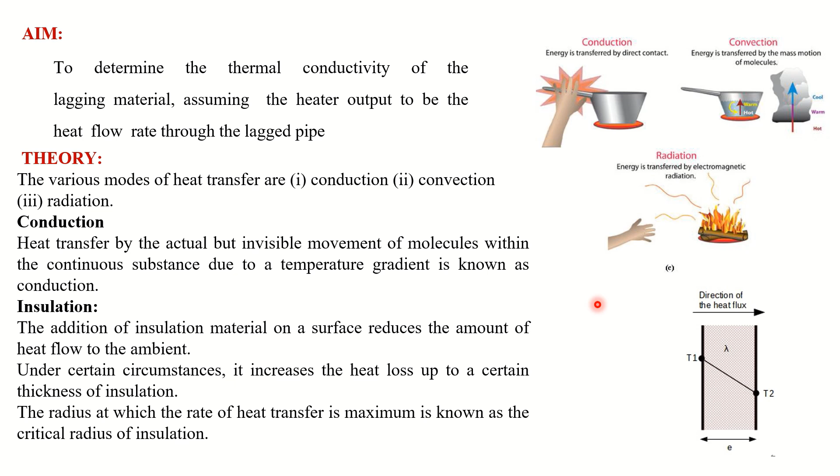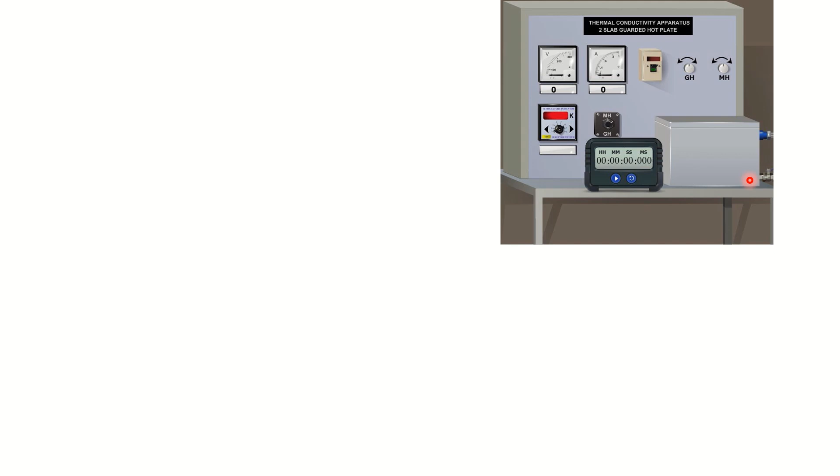So what is the aim of the experiment? To determine the thermal conductivity of the lagging material by performing an experiment in an experimental device. So what is that experimental device? Let us see how it looks and the description of the experimental setup. The experimental setup consists of a rectangular duct. Inside this rectangular duct, we have a hollow cylindrical pipe which is covered with two layers of insulation.

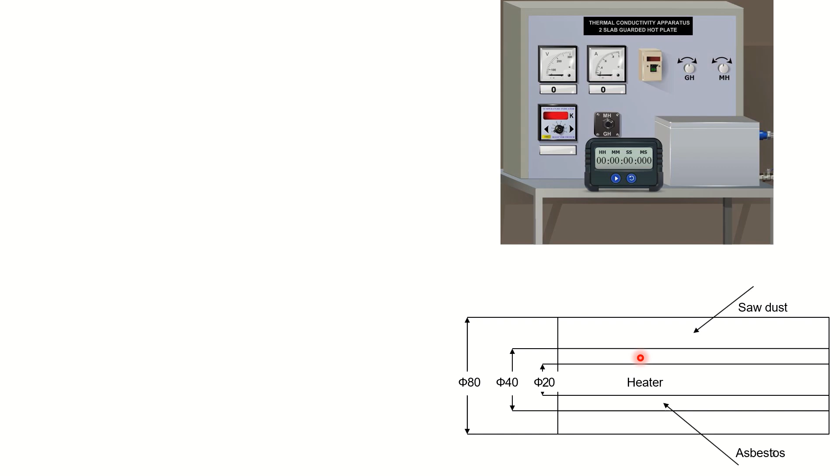The schematic representation is shown here. Since it's a closed duct, inside that duct we have an arrangement like this. It has a hollow cylindrical steel pipe covered with two layers of insulation. Layer 1 is made of asbestos and layer 2 is made of sawdust. We have thermocouples across this pipeline, at the interface between the sawdust and asbestos layers, and at the outer surface of the sawdust. The temperatures sensed by the thermocouples are displayed on a digital temperature indicator.

There is a voltmeter and ammeter to regulate the power supply to the heater. From the heater, heat is transferred to the cylindrical pipe. The cylindrical pipe is actually connected with the heater. So by regulating the power input, you can supply the required amount of heat to the heater, and from the heater, heat is transferred to the cylindrical pipe.

So what actually happens in the experiment? From the heater, heat is transferred to this hollow cylindrical pipe. From this hot surface, heat is transferred to insulation layer 1, and from insulation layer 1 it is transferred to insulation layer 2 by conduction. Now let us see how to perform the experimental procedure.

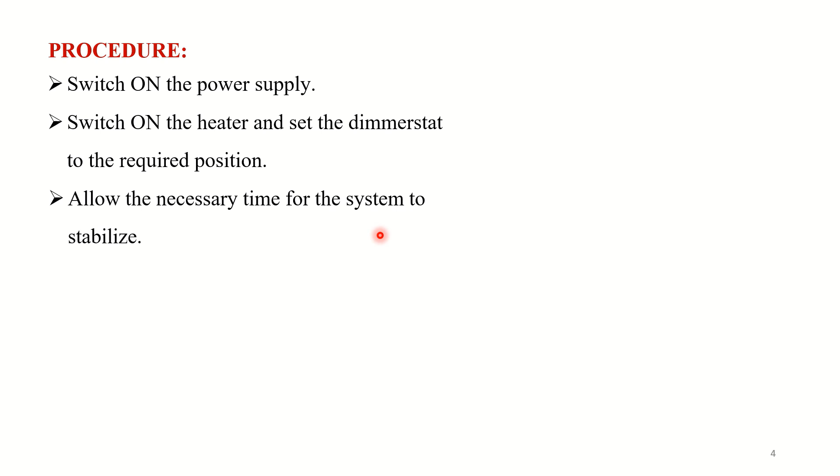First, you need to switch on the main, and then you have to set the dimmerstat position to adjust the power input to heater. And you need to note down voltmeter and ammeter reading. Allow the necessary time for the system to stabilize.

After that, you need to note down temperature data, that is temperature across the pipe, interface between asbestos sawdust and outer surface of sawdust at a time interval of 5 minutes. That is, for every 5 minutes, you need to note down this temperature data till the system reaches steady state.

How to identify the system has reached steady state or not? Once the system reaches steady state, the net rate of heat transfer becomes zero. So you will get constant set of temperature data. Once you arrive at constant set of temperature data, you can start performing the experiment. Then the observation data can be substituted in the appropriate equations to find out the thermal conductivity of lagging material.

So in this experiment, as I mentioned earlier, in the experimental device, we have a cylindrical pipe which is covered with asbestos layer, and that is covered with sawdust layer. So we are going to find out thermal conductivity of sawdust. It is not like for a new material we are going to invent its thermal conductivity. For sawdust, we have standard values of thermal conductivity. We are going to perform the experiment and find out the thermal conductivity and compare the results with the standard data available in data book.

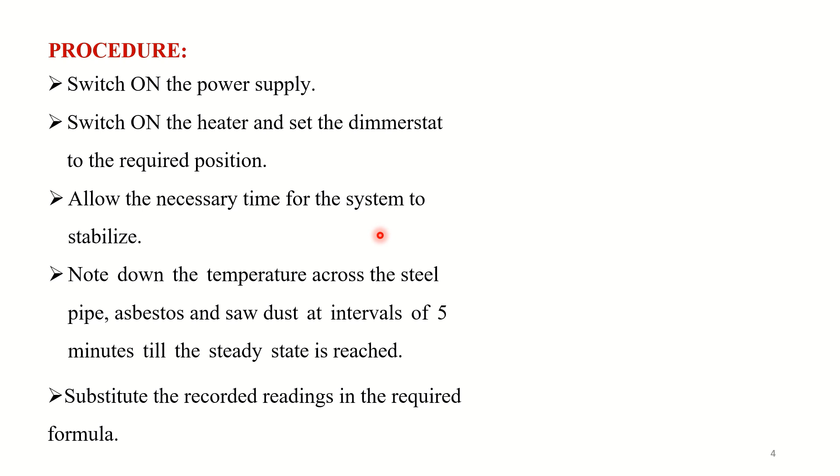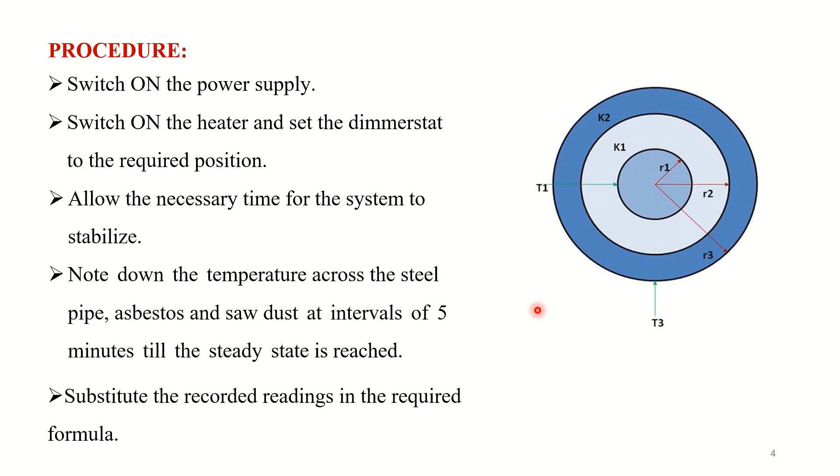Then let's see how to make the tabulation of observation data. So as I mentioned earlier, the first step, we need to regulate the power input to heater and need to note the voltmeter and ammeter reading. So V refers voltmeter reading, note down that. Then I refers ammeter reading, note down that.

The next step of observation, temperature data. So T1 and T2 are pipe surface temperature. T3, T4 are asbestos sawdust interface temperature. T5 and T6 are outer surface temperature. TA is the average between T1 and T2. TB is the average between T3 and T4. TC is the average between T5 and T6.

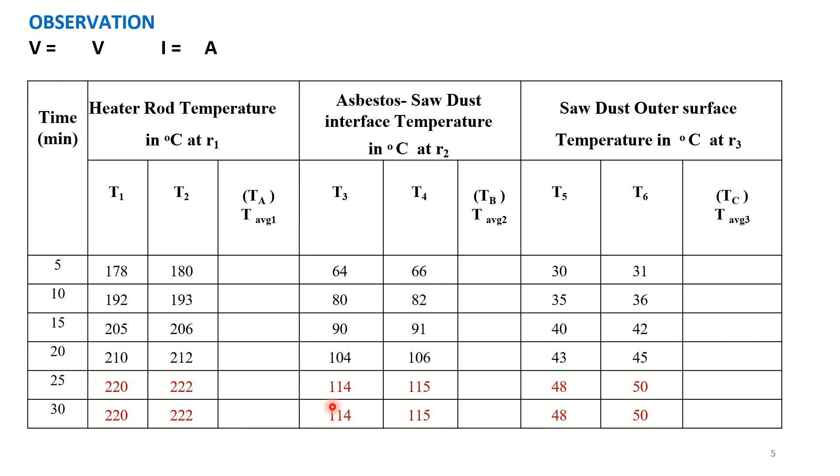So the temperature data you need to take at 5 minutes time interval until you get constant set of temperature data like this. Once you arrive at this kind of data, you can start performing the experiment. Then we'll move on to calculation. How to make the calculation for finding thermal conductivity of sawdust.

We are going to do the calculation by taking the assumption rate of heat input to heater is equal to heat transferred to pipe surface. The rate of heat input to heater can be calculated using the formula V into I, where V refers voltmeter reading and I refers ammeter reading. So this value can be equated with rate of heat transfer to pipe surface, and from there thermal conductivity of sawdust can be calculated. Let's see what is the formula for that.

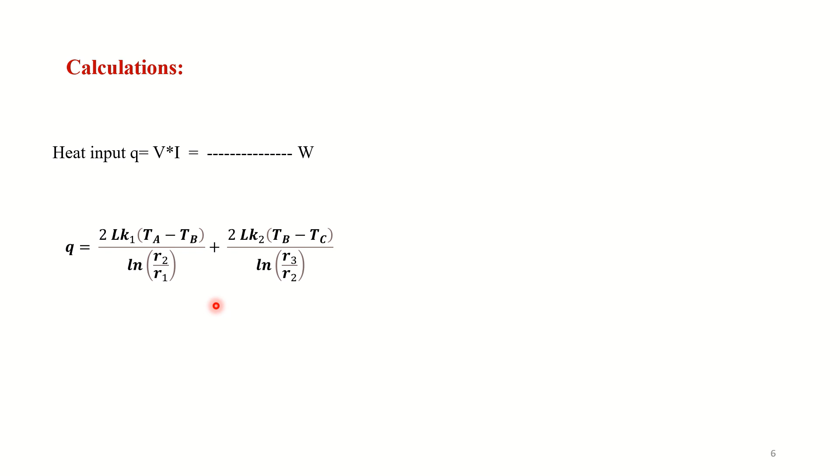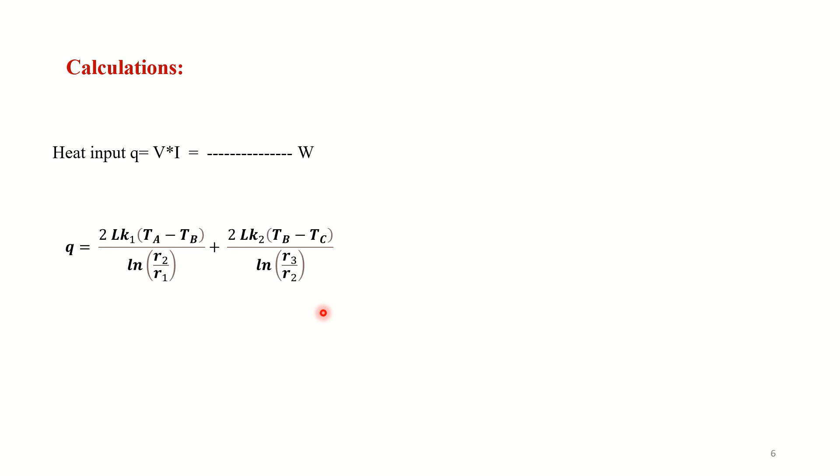So this equation refers the rate of heat transfer to pipe surface, and that is the composite system. So here we are given with the overall rate of heat transfer equation. In this equation, K1 refers thermal conductivity of asbestos layer, K2 refers thermal conductivity of sawdust, TA, TB, TC are the average temperature of pipe surface, temperature at the interface between asbestos and sawdust, and outer surface temperature. R1, R2, R3 are radius of inner pipe, asbestos layer and sawdust.

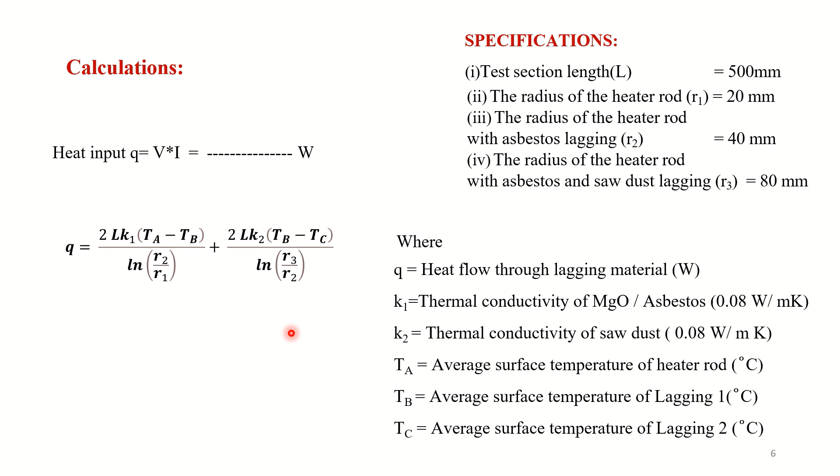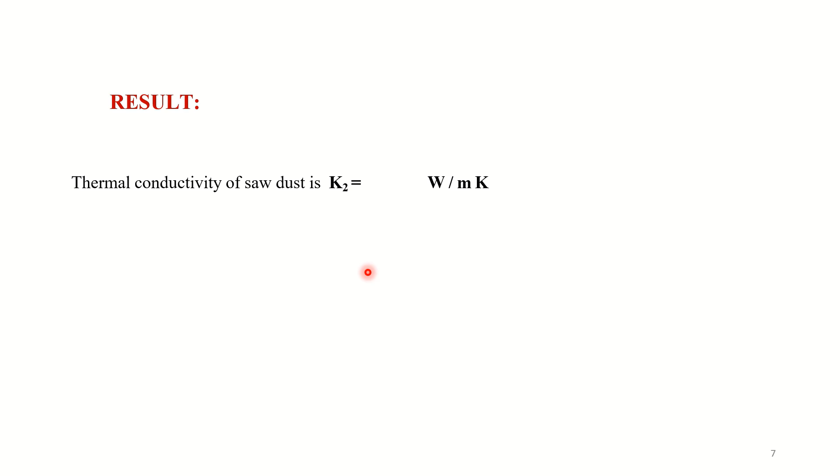And in the specification, you are given with radius, length of the pipeline, and also here you are given with thermal conductivity of asbestos. By substituting all the known data, the unknown data K2, that is thermal conductivity of sawdust, can be calculated. Next, we'll tabulate the results. Thermal conductivity of sawdust can be listed here, and the value can be compared with the standard value available in the data book.